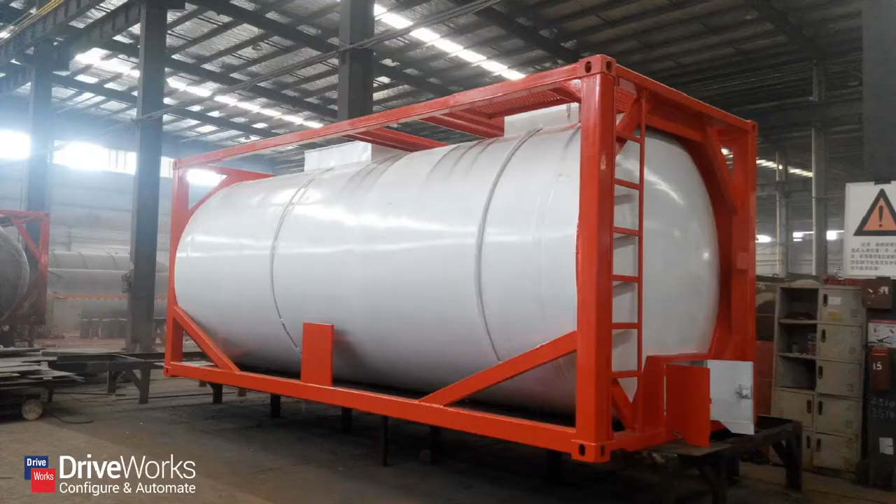When we talk about design automation with DriveWorks, we talk about this term same but different. Design automation for same but different designs. DriveWorks works with any SOLIDWORKS models, but the type of models it's most suited to are things like pressure vessels, windows and doors, shelving units, cabinets, things that often look the same when you go around your town or country. They look the same, but there's variations in their design.

So if we focus on this pressure vessel, what are the variations? We've got dimensions that will change depending on customer requirements. We might have the type of material used to manufacture the vessel, depending on the type of fluid it's going to be holding, and different fixtures and features and so on that make this custom to a specific job.

Now, to talk about what DriveWorks can do, I always think the best place to start is by looking at the entire manual process. How does a custom pressure vessel go from the things that I want into actually getting that design out the door? And remember, this is universal. You can use it on any SOLIDWORKS models. This is just an example.

So how might we start? We might start by a salesperson going out to someone that needs a new pressure vessel and deciding what the requirements of that are and filling out a specification sheet. It might be manual, it might be some custom software that does it, or it might be online, it might be a Google form or something like that. And they'll go through, they'll get where it needs to go, they'll get what it needs to do, they'll get the dimensions that it needs to fit in.

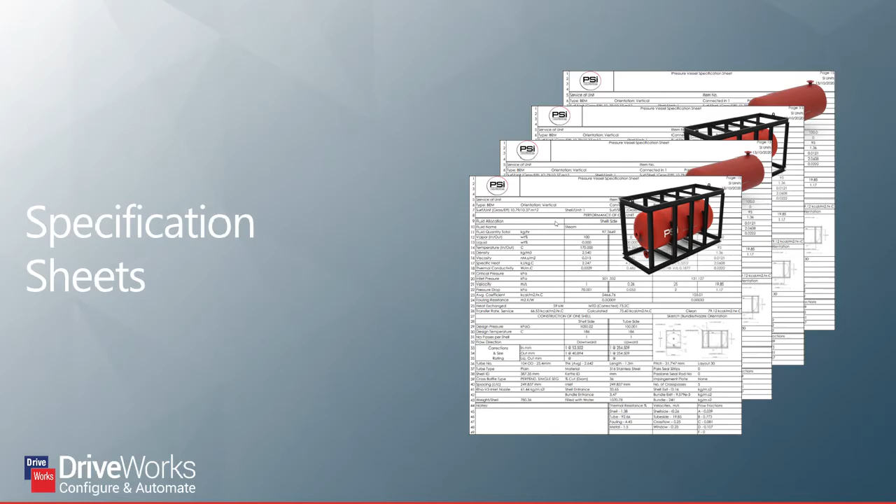And they'll get all of this and they'll take it back to a SOLIDWORKS engineer to go and start creating the manufacturing data. So this might land on someone like yourselves' desk, and you have to go through this manual process.

So often with these same but different type of designs, we start with a template. So here we've got a pressure vessel template. This is just one that we always start from. We go and take a copy of that. So in terms of SOLIDWORKS, it might be a pack and go, or you might just copy all of these files. So we're working with a brand new data set.

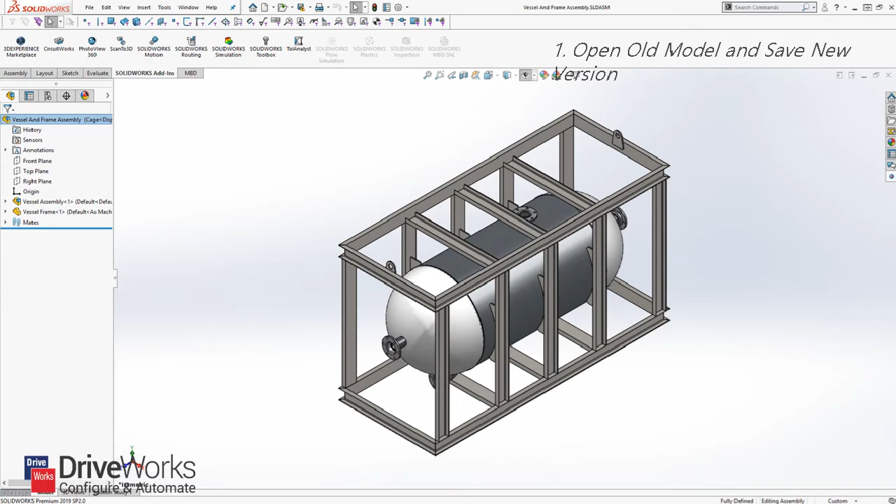And now the process comes of customizing it to fit in with the customer specification. So we'll go and open each part inside that overall assembly. We'll go through and change the parameters so it meets the customer's requirements. So here we're changing a dimension. That might be something that's specified on that spec sheet, or it might be the type of thing that's got a bit of intelligence built into it.

You might have specified, okay, I want my pressure vessel to have a 1,000 millimeter diameter. You might know that the frame actually needs to be 1,000 plus 200 for whatever reason. The specified amount of diameter, the frame height to fit in the pressure vessel needs to add 200 millimeters to that always. And that's the type of design knowledge that's in your head, and you'll go through and you'll change all the dimensions to meet those customer requirements.

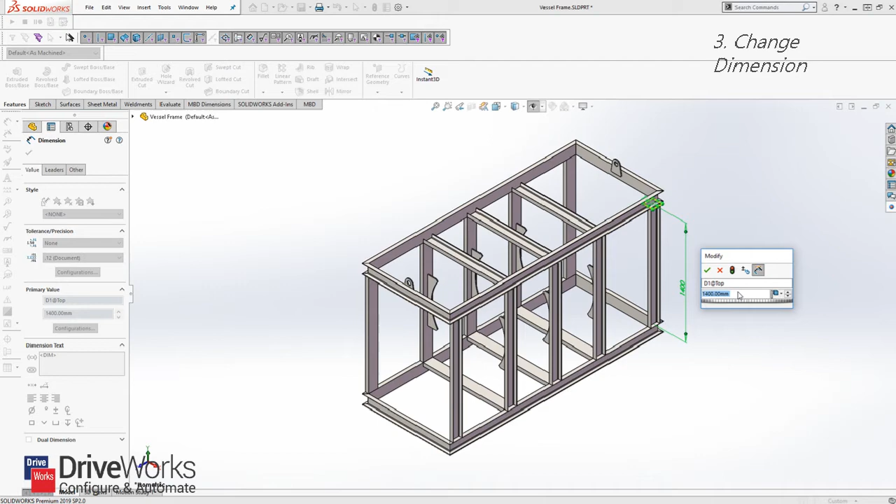Maybe after you've done your dimensions, you'll go in and change your features, turning them on and off, maybe creating new ones, editing the parameters inside each of those features to make sure that the models that you're creating fit in with that custom specification that we talked about at the start.

Now, when we've got our kind of geometry sorted out, we might go and change the materials to make sure it's suitable for that job. Again, might be a bit of your design engineering knowledge. You know that if it's holding a certain type of liquid, then it needs to be a certain material, so it's valid, basically. And that might be in your head.

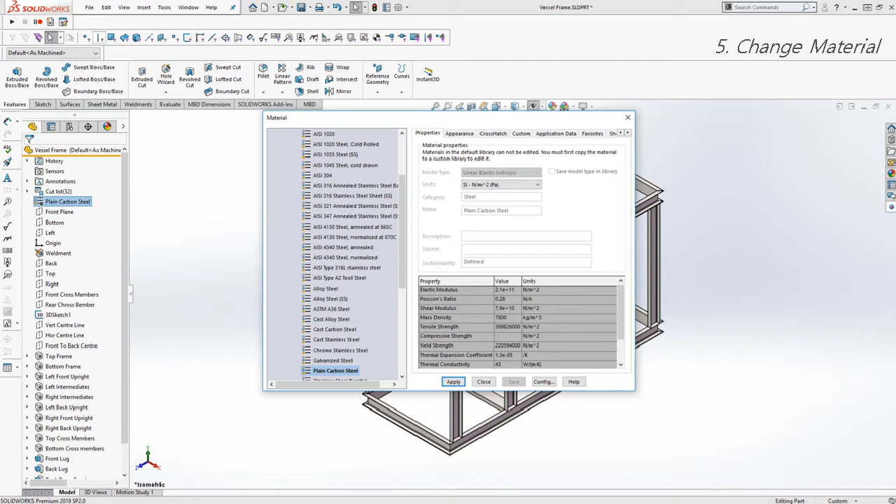And you go through and select that manually. Go through and add all the metadata you need, so your order numbers, your material, when it needs to be manufactured by, when it was ordered, and you go and type all of that in manually. And there's only a few there, but you might have a lot of metadata with each of your parts. That can actually take quite a long time, as I'm sure you know.

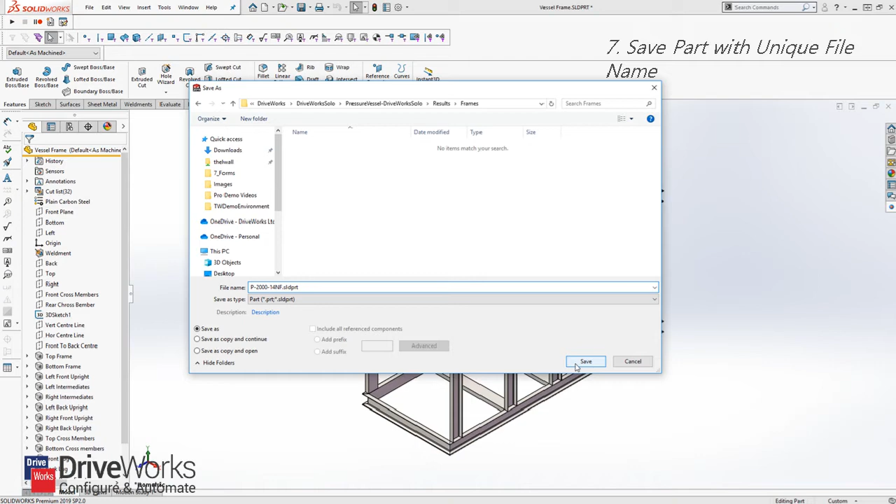Then after you've made all of those changes, you're ready to save your part, and save your part with your company's naming convention. So that might be, as you can see on screen, or it might be a different serialized naming convention. And that's all done manually, and it can be quite difficult to get right sometimes.

So once you've done that, you go through all the other parts, you do the same process for all the other parts, and you're left with your unique assembly that meets the customer's requirements. And then you go and actually create your manufacturing data, your drawing, save that as a PDF, send it off to the shop floor. And you've done that whole manual process of creating a same but different design.

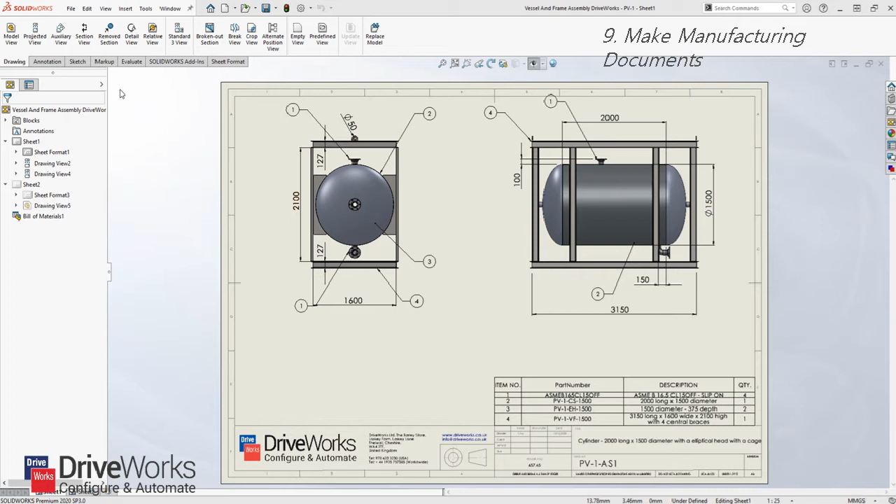So what DriveWorks does is automates that entire process. So we're going to watch a little video now. I think the sound might be quite loud, so what I'm going to do is explain what the video is and then play it, just so I don't have to talk over it at all. This video is going to show you what that process looks like in DriveWorks. So I'm just going to hit play now. You won't hear me speaking for a second, and then I'll recap once the video has ended.

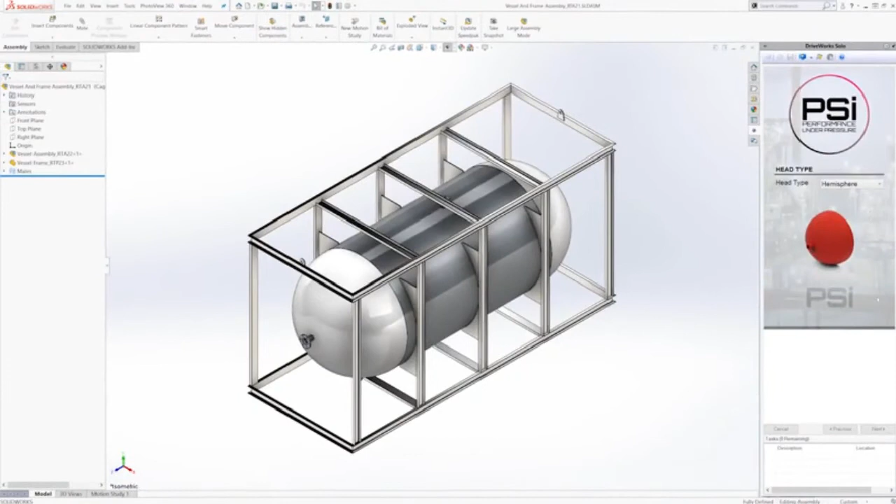So hopefully you can hear me. But here we've got, instead of that spec sheet, we're filling in a custom form on the right-hand side. This is inside SolidWorks. We're filling in that custom form to meet those customer requirements. And we're getting a bit of dynamic updating there, might be minimum and maximum values to ensure those inputs are valid. And then when we're happy with those inputs, we're going to hit finish.

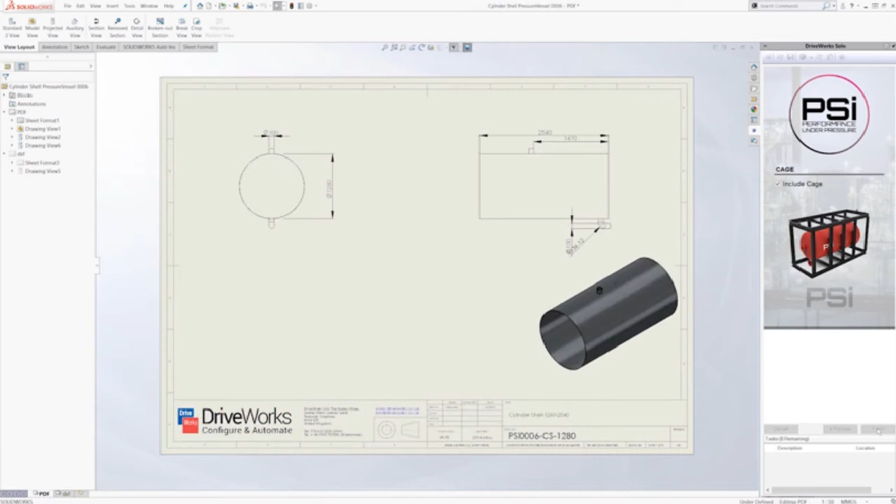What finish does is take a copy of that template automatically, drives all the different dimensions, features, custom properties that need to be created, and goes and creates your drawing at the end for that custom, same but different design. And that's what you can build, that project that does that using DriveWorks. And once you've built it yourselves, you can run that over and over and over again. So that's just a quick video showing you exactly how this process works inside DriveWorks.

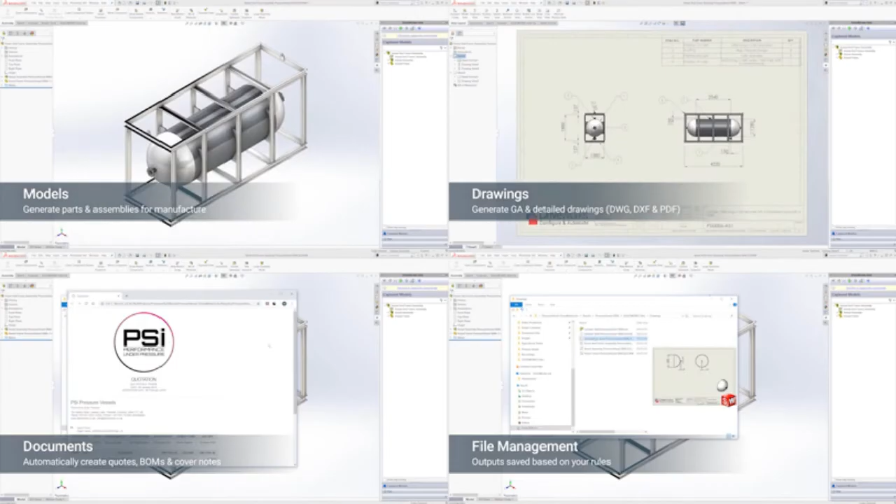So now we've seen the process, what DriveWorks is, we've seen the process it automates, and we've taken a look at what DriveWorks looks like in action, actually automatically doing all of that. We need to know how it works. So there's 4 steps to automation when we're talking about DriveWorks, to our design automation. The first step we do, you can see it on the left-hand side of your screens. We capture our design parameters.

And what that means is we take our template that we're currently having to manually do all the time. We take that template and we capture it. So we tell DriveWorks, I want to create new versions of this. That's what we call capturing. And inside each part inside that assembly, we tell DriveWorks, I want to change this dimension in the new versions of this file that I want to create. I want to be able to change this feature in the new versions of this file that I want to create. And we go through all of our parts and tell DriveWorks what might change. We call that the capturing process.

The next bit is to build that input form so we can get the users' custom values off them, their custom inputs, and make sure that they're valid, so putting things like minimums and maximums, guiding users through that specification process. And they're the first 2 steps, so the capturing bit, telling DriveWorks what might change, creating an input form, allowing users to specify new products.

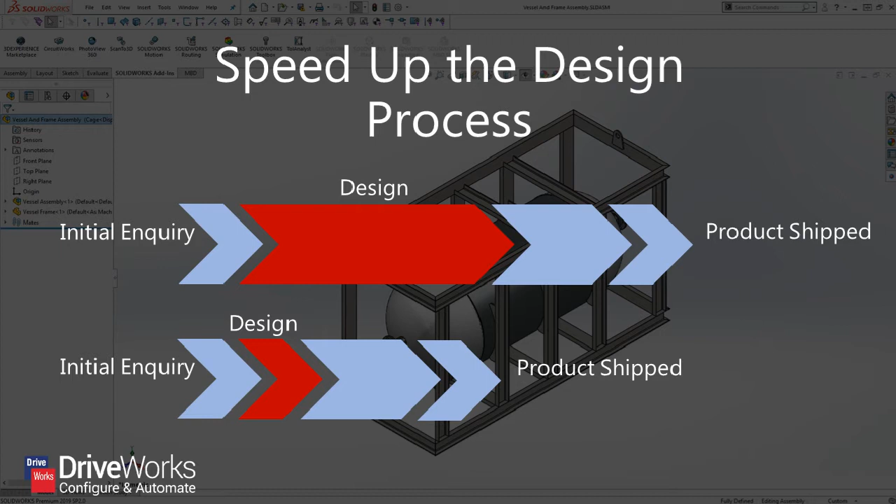Another benefit is one that might be overlooked a lot of the time: eliminating avoidable mistakes. So a lot of the time, if you're doing the same but different designs, you might be changing the same dimension in lots of different parts, and having to add a certain value to it. And it's quite easy to make a mistake there. In addition to that, when we looked at those custom properties, it's quite easy to enter incorrect metadata or even save it in the wrong place with the wrong name.

I know I've named lots of things copy one in brackets, one again, just to get going with things. But building all that into a DriveWorks project means that we never have to do that. DriveWorks will name our files for us based on a set naming convention. And obviously, if we're generating more accurate manufacturing data, we're going to reduce those quoting mistakes as well.

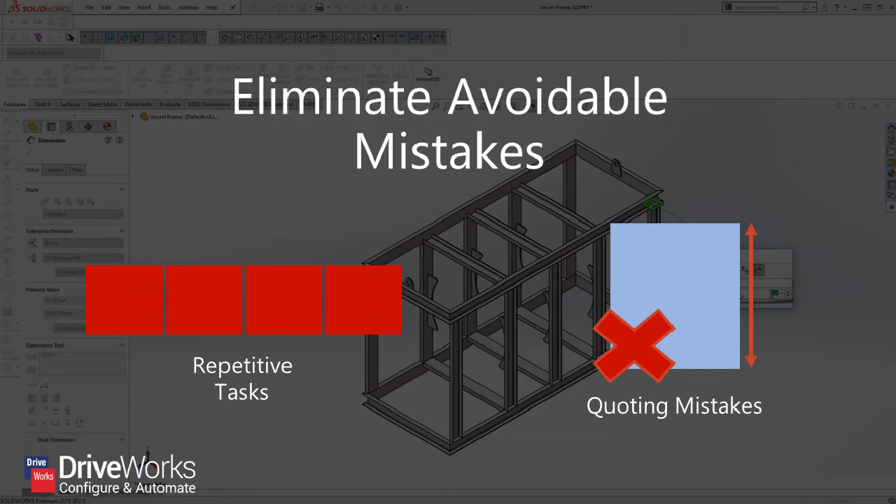But my favorite benefit is this next one. It actually frees up your engineering time. Redoing same but different designs isn't using much of your engineering skill. And automating those processes allows you to actually work on new projects, develop existing products and automate more and more. And the great thing about DriveWorks is, with the time you get back from using design automation with DriveWorks, you can automate more and more of your products. And we'll see what that means graphically in a little bit of time.

So that's an intro to DriveWorks. We've talked about what DriveWorks is. We've talked about the process that it actually automates, what that looks like and how it works. We've looked at some of the benefits, but I think it's time to start looking at the actual software, what you can get started with today.

So that product is DriveWorks Express. As a SOLIDWORKS user, anyone with a seat of SOLIDWORKS or access to a seat of SOLIDWORKS also has access to our entry-level design automation tool, DriveWorks Express. And that's what I'm going to be focusing on today during this live demonstration, building a project from scratch, taking an assembly and automating it so that we can generate brand new versions of it automatically using DriveWorks. And this is our entry-level software. We'll talk about the other software that we offer later on, but let's just get on with the demo.

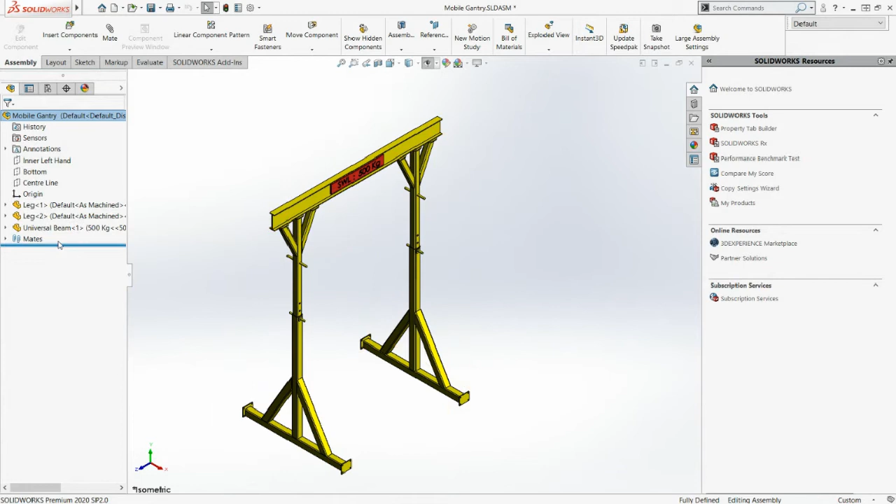And we can see that if we go over here to the feature tree, it's pretty simple, but this is just because we've not got too much time today. And I know how this has been put together very well, as you will know your own components, so you can do something similar to your own components with all that design knowledge. So in here, I've got 2 different components inside the assembly, the leg and the universal beam, and I've got 2 instances of my leg.

So the first thing to do with DriveWorks is we need to go up to Tools, hit Express Products, and hit DriveWorks Express. Now that'll open in the task pane on the right-hand side, and that's how easy it is to open up DriveWorks Express. If you're a student, you'll be able to access that automatically.

If you're not using a student version or an educational version of SOLIDWORKS, you'll need to activate DriveWorks Express. It's still free. You just need to go to My SOLIDWORKS and get the code from your My SOLIDWORKS account. And you can Google DriveWorks Express activate to automate, and you should be able to get a step-by-step process. It's very simple, and you'll get to this point. So now DriveWorks Express is open, and I have my assembly open.

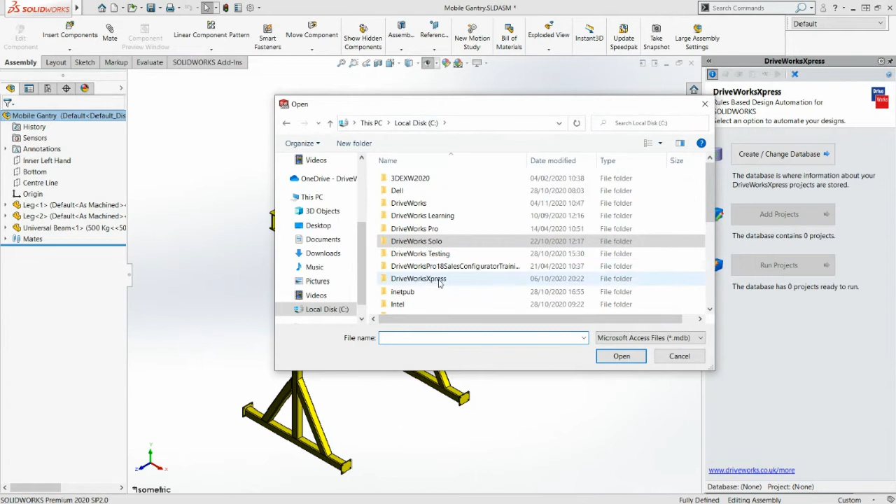The first thing I need to do is create a database. Okay, so what this is, is creating a place to save all of those decisions. So I need a place to save what I capture, where my rules are, what my forms are. This is what this database is. So in there, I'm just going to call it mobile gantry. And hit open. And perfect. I've created a space to save all of my decisions.

And the next thing I need to do is capture my first thing. My first thing is my top level assembly that I want to create new versions of. And DriveWorks Express is quite nice, and I can just hit use open model. As simple as that, I've captured the top level. I've told DriveWorks, using this project, I want to create new versions of this.

The next step, and it's kind of laid out in a nice tabulated way, is I need to capture my assembly structure. So inside this assembly, which components do I want to create new versions of? In this instance, I actually want to create new versions of both, because my leg, when I need a different opening height, that needs to grow and get taller and smaller. And my universal beam, because it needs to get wider, and I want to change my safe working load as well.

If we had standard components in there, maybe something like hinges or feet that don't change size, don't change dimensions, and you just want to have them reference the same file that your master file does, your template file, then you don't need to check that box. This is just telling DriveWorks, I want to go and create new versions of this leg and this universal beam when I create new versions of the top level.

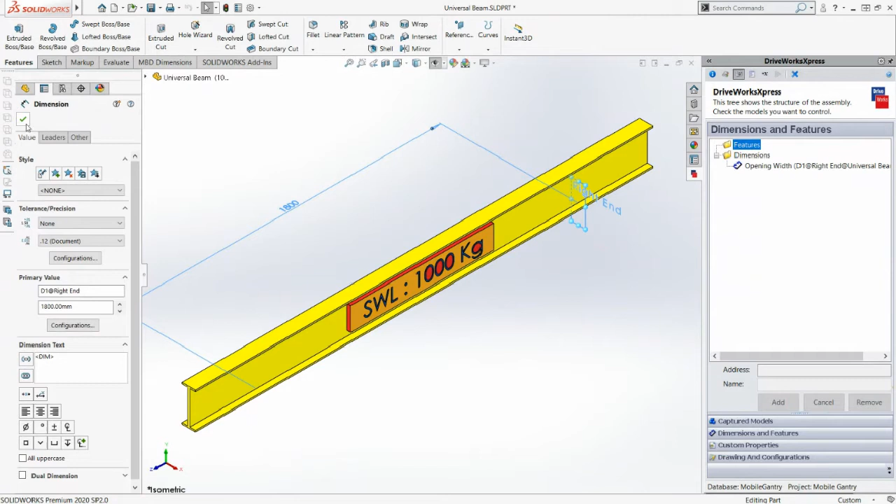So when I build those rules later on, I know what to do. And hit add. In terms of features, I don't need to turn anything on and off inside this part, but I do want to be able to go and change the configuration it's in. If I look at this template file, you can see that we've got 3 different configurations: 1,000 kilograms, 1,500 kilograms, and 500 kilograms. That's what I'm going to swap in the new versions of this part,

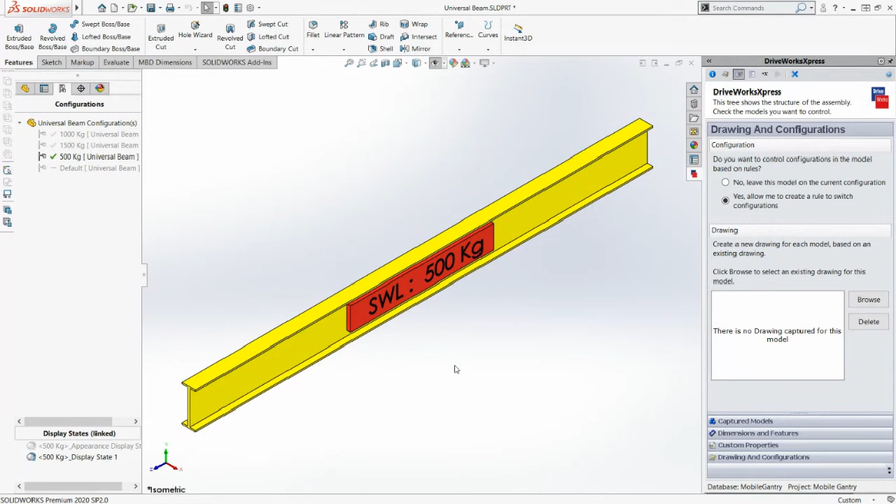and I want the ability to do that. So that means I'm going to go down to my drawings and configurations and just check this radio button. Yes, allow me to create a rule to switch configurations. And as simple as that, I've actually captured everything I need to in my first part. So when I'm done with that, I can close it if I like. I'll just save that. That's just SOLIDWORKS saving. I've already told DriveWorks what I need to do. And I've already saved all the capture parameters inside DriveWorks, because it's a database. You don't have to hit save, it just saves it automatically.

And then I'm going to capture all the parameters inside my other part, my leg. So in here, like I said, I know this model quite well, in the same way that you'll know your model, so you'll know what to capture, what changes when you go and make all those manual changes for your same but different designs. So I've just selected the dimension that defines the opening height, and I'm just going to type in opening height there and hit add. And that's just going to tell DriveWorks I want to be able to change this value in the new versions of this file. Fantastic. So what else do I want to do here?

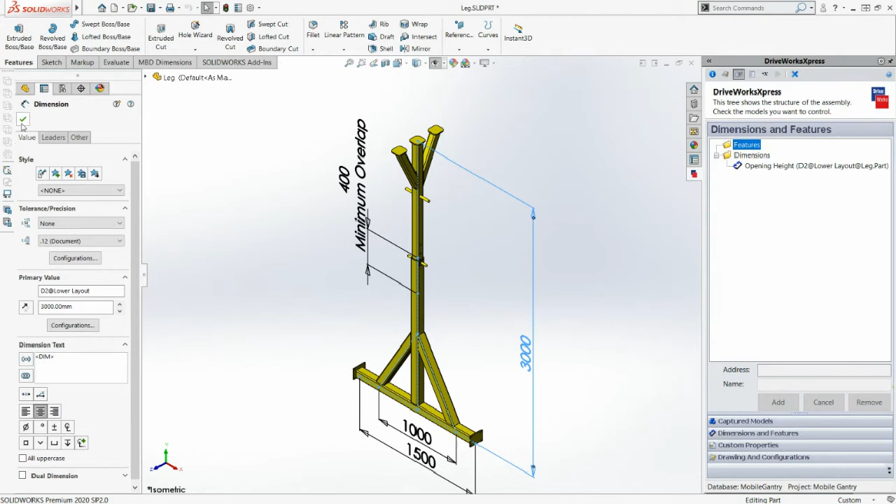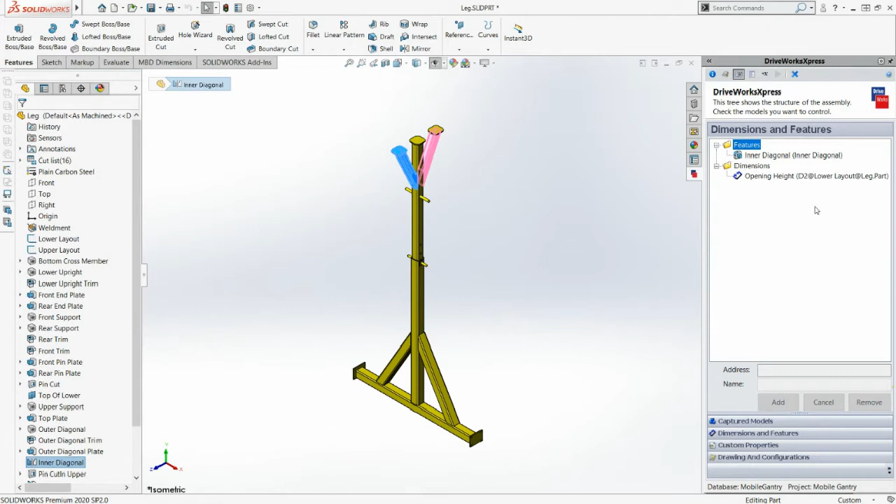I've not got any custom properties that I want to change here, but I do want to be able to change this inner diagonal feature. So I can simply graphically select it, and let's do it over here. You can just graphically select things, or you can select it from the feature tree as well. And that inner diagonal, I'm going to add it. So I've captured that, and I can now, in the new versions of this, turn that on and off. And we could keep going. We could add drawings so that when I create new versions of this, we also create a drawing. But I'm not going to do that for now. I've told DriveWorks everything I want to be able to do with new versions of this part.

So I'm just going to hit close on that, go back to my mobile gantry, and just add a general assembly drawing so that every time I create a new version of this model, I also create a new version of my drawing, which is really nice and saves me lots and lots of time. Inside DriveWorks Express, you don't get the ability to control that drawing much, things like scale and position of different views. So a bit of manual work is often required, but inside Solo and Pro, the next level up of this software, you can control all of that.

So that's great, and we've done the first step. We've captured everything inside this assembly that we want to create new versions of, our mobile gantry, leg, and universal beam, and we've also captured everything inside those parts that we want to change. The next thing I'm going to do is go and build that user interface, build my forms, and this is really, really simple. So the first thing I'm going to do is hit add up there. You'll notice at the top bar, I've just clicked form. It's quite self-explanatory, capturing, form, rules, and that's how you navigate between the different sections of DriveWorks Express.

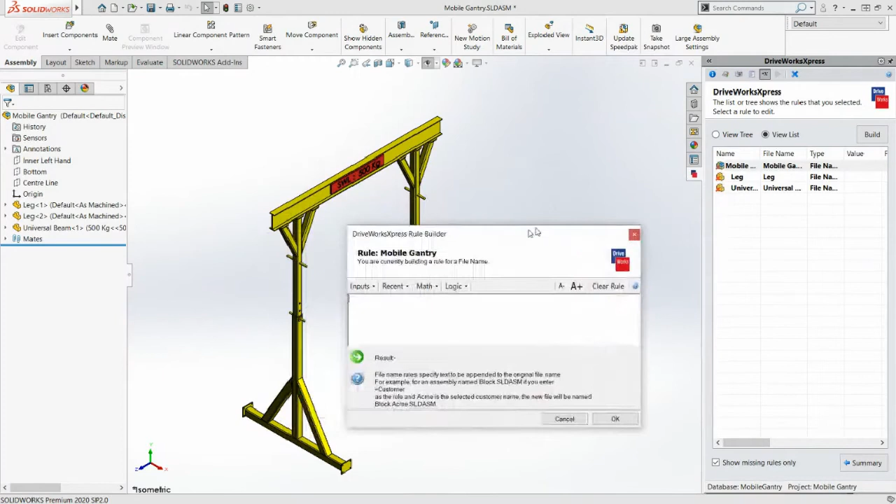So these are going to be really simple to start off with, but I'm going to select the mobile gantry, going to hit build, and that's opened up the DriveWorks Rules Builder for the first time. So I'll try and move this so you can see everything nice and easily, increase the font size, so hopefully that gives you a better look.

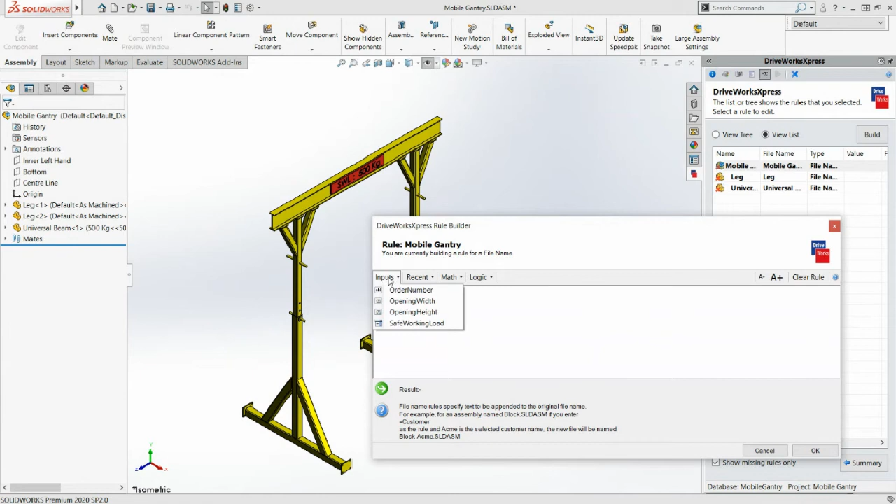And this DriveWorks Express Rules Builder is there to help you build your intelligence and link your inputs to your capture parameters. So you'll see up here, this white section is where we actually build the rule, the syntax we can type out in here. We don't want to do that right now. What we want to do is take one of our inputs, so that order number input, and we want to create our new files with that order number appended onto the end of it.

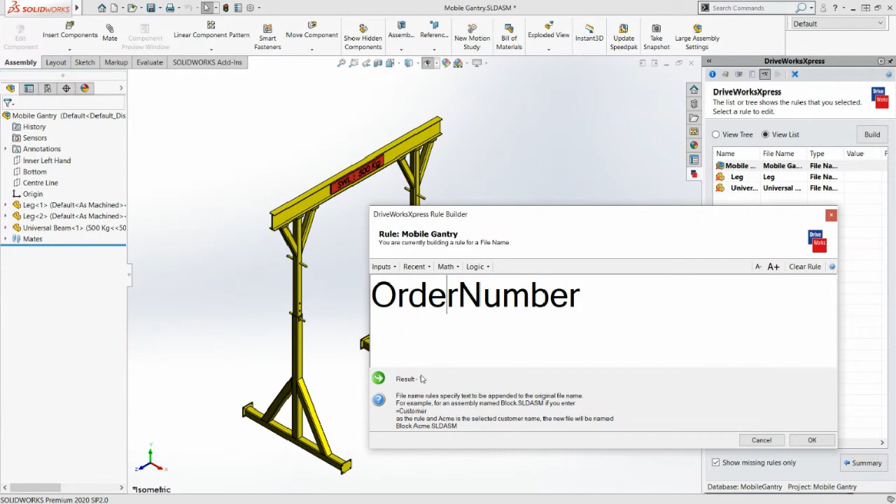So what this is going to do, we're building it for the mobile gantry. When we run this project, we're going to create a new version of the mobile gantry, and we're going to save it with the file name mobile gantry 1. Okay, we can see that that's why I set some defaults, so we can see what this is going to result in now. So I'm going to hit OK.

And we can multi-select to make things quicker. Just for ease, I'm going to build the same rule. But in here, we can build in all that intelligence, so we don't have to manually type out a file name rule anymore. We can take parameters that people are inputting and save out our file names with those names. And we'll take a look at more in-depth rules in a second. I'm just going to use my order number again.

What's great is that all around the DriveWorks Express Rules Builder, wherever you are, you get a little bit of help. So here it says file name rules specify text to be appended to the original file name. Great. If you've not used DriveWorks Express for a little while, or you can't remember exactly how I said this worked, you've got a little bit of help there, so you should be able to get going nice and quick. Now I'm going to hit OK.

And you can see that everything's disappeared from this list because I've built rules for all the file names I need to. I can go and see all the ones I've built if I want to go back and change anything. So that's a great thing about a DriveWorks project. You own it. It's nice and easy to use. There's a good user interface in the background, so you can go and change and develop your project as it grows. I'm going to go back to my summary, and we can see that there were 3 missing rules for my file names. That's gone down to 0.

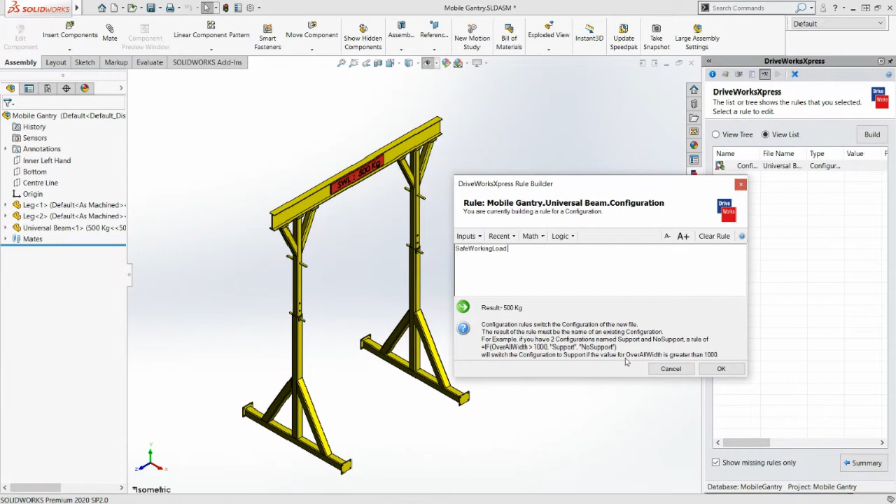And I'm going to uncheck that and go down to my configurations. So you remember this was the captured configuration for my universal beam. I want to build a rule for this, and because my configurations of this part match exactly the inputs for my safe working load, and because I've set those defaults, we've got a result. We can see that there. I can simply build a really simple rule, taking input and directly linking it with something that I've captured. And again, we've got that helper text down there, so you can use it to help you build slightly more complex rules. I'm going to go back.

And now we've built our configuration rules. Remember, I didn't capture any custom properties, but it's very easy to do. Just go back to the capture pane, decide on any custom properties inside each of these, capture them, and you can drive any text you want into them in the new versions of the parts. The next thing I'm going to do is build my dimensions. So if I edit those rules, I've got 2 because I captured the opening height of the leg and the opening width with the universal beam.

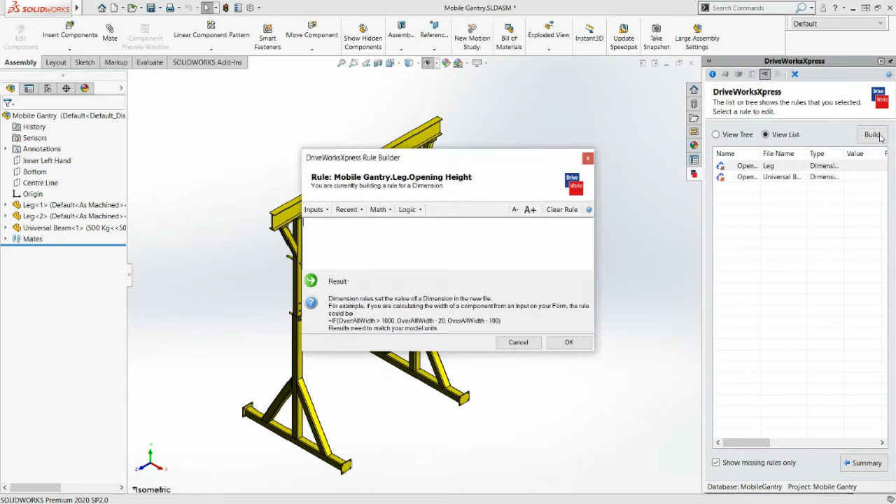I'm going to go and hit build here. Opens up the DriveWorks Express Rules Builder. And inside here, I'm going to link it to my opening height. So I've got about a 3,000 result there. Now, it might not be as simple as just linking it. This is a quick demo, so it is. But you might want to do some maths in there. So you might want to plus 200 to the value that someone's inputting. You want to drive that capture parameter with that. Or go back.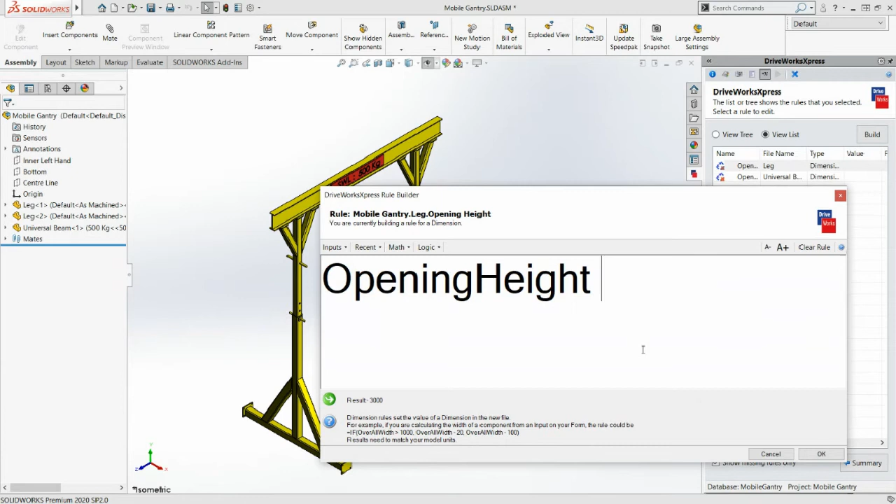You might want to divide by something, or times by something, or subtract something from the value someone's entering, or take two different values that people are entering and add them together or multiply them together. You can do all of that using the DriveWorksXpress Rule Builder and build your engineering knowledge into your DriveWorks rules. So I'm just going to have it as opening height.

That's great. If I hit build and go to my opening width, just link that up and that's done, perfect. So I've built all my dimension rules as well, and we've got one final rule to build, and it's this feature. So here's where we're going to look at slightly more complex rules.

Remember, I captured this inner diagonal, so this part of the leg component. What I want to do is turn this on and off depending on what a user inputs. So what does that mean? Let's go and have a look.

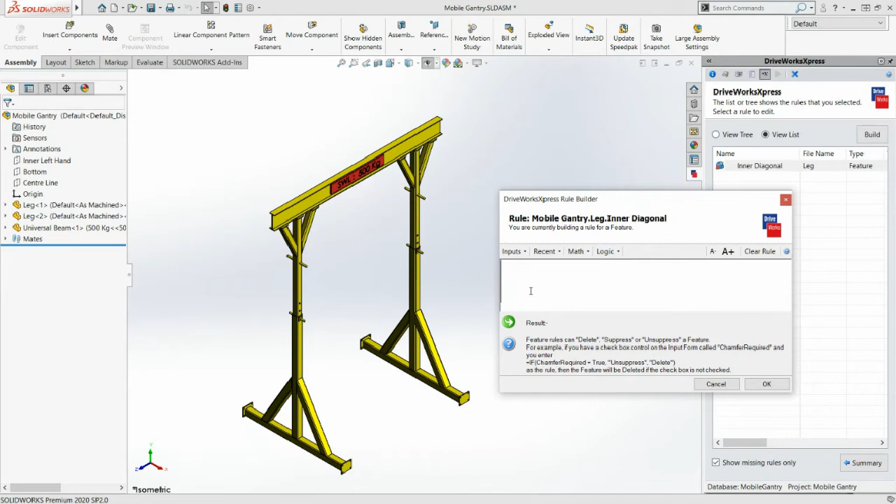So when a user specifies a value over 2,200 for the opening width, I want to include it. I want it to be there in the versions of the leg that I create. When it's below that, it doesn't need that inner diagonal support, and we can get rid of it. So I've got to start using some logic inside my DriveWorks Express rules.

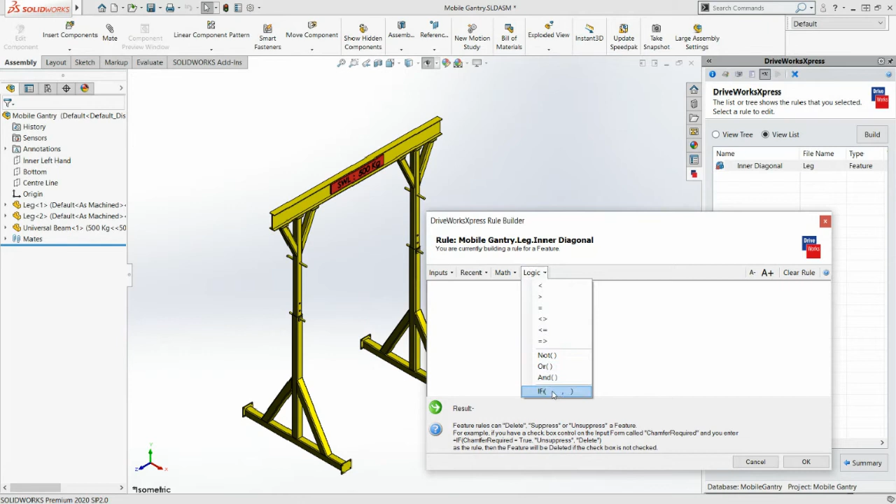So here is where you'll start seeing it look a little bit more like Excel. You can go down here and we've got our logical statements, our less thans, our greater thans, our equal tos, our does not equal. But down here I'm going to use this if function, okay? And we call this an if statement inside DriveWorks.

This is made up of three different parameters, and the first one being our condition. So our condition is going to be: if our opening width is greater than... and you can just type in, you don't need to use the drop downs, but it helps. You'll notice this has gone red, the background, because it's an invalid rule. So DriveWorks is kind to you and helps you not build invalid rules.

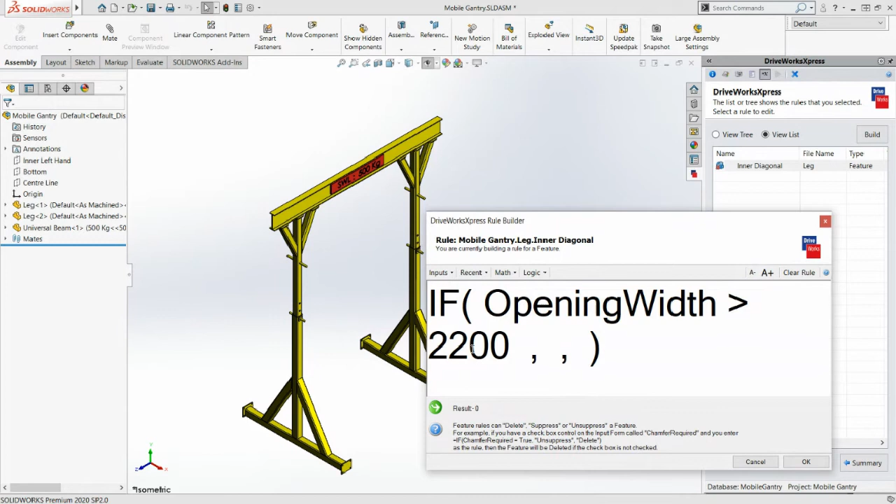So when my opening width is greater than 2,200, then I want this to be unsuppressed. So I'm going to build a text string. All text strings are inside quotes. And what's perfect about this is my spelling isn't great, but we've got a bit of helper text down here to tell you what this rule should evaluate to.

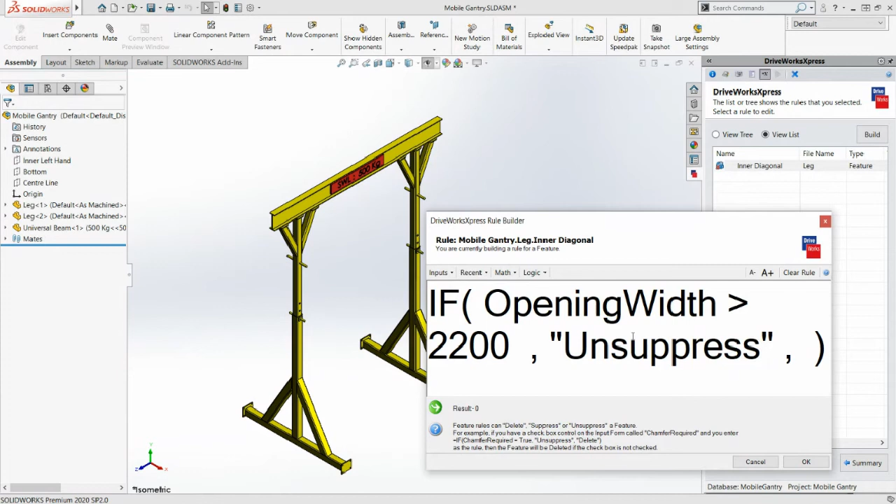It should evaluate to either delete, to remove it, suppress to suppress it, or unsuppress to unsuppress it and have it there. So when it's greater than 2,200, I'm going to unsuppress, and if not, then I'm going to suppress. At the moment, because my opening width is less than 2,200, you'll see that my result is that it's going to be suppressed. This condition is false, so I'm going with the second option. And when it's true, it will go with the first option.

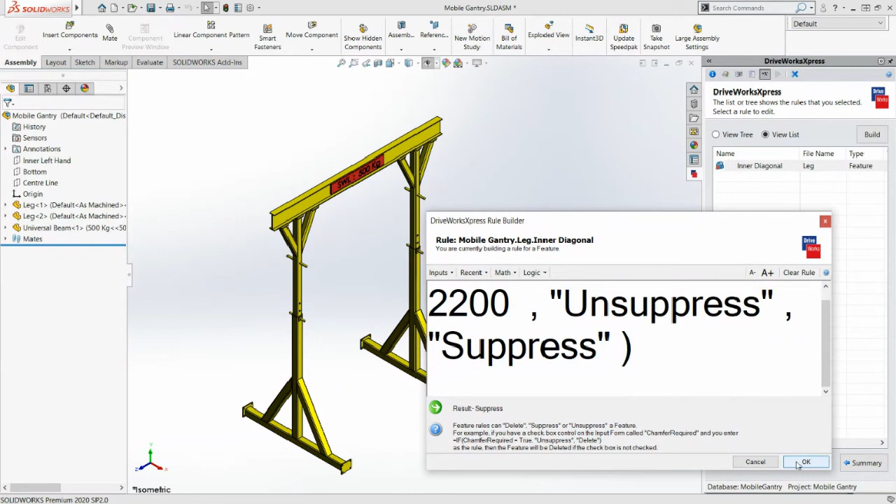Okay, so that's how we build some of that design intent and design intelligence into our DriveWorks rules, and we can start seeing that it's looking a little bit like Excel syntax. So I'm going to hit OK now and go back to the summary, and that's really good.

We can actually see that we've built all the 7 rules that we need to, and we've done the first 3 steps. We've captured everything that might change. We've created an input form so we can enter new custom values for the new product we want to generate. And I've linked them together using rules, and we've even used a bit of intelligence, that if statement, to say if the opening width is greater than 2,200 we need this feature, if not we can suppress it. We don't need it, it isn't required. And we'll actually notice that this icon has turned green. So we're ready to do the 4th step.

And it's the bit where you get back all of that time, and we can go and run our project. So here I've got my defaults. What I'm going to do is hit create here. And we could close everything right now. We don't need to, but we could close all these models, they don't need to be open. I'm just going to hit create.

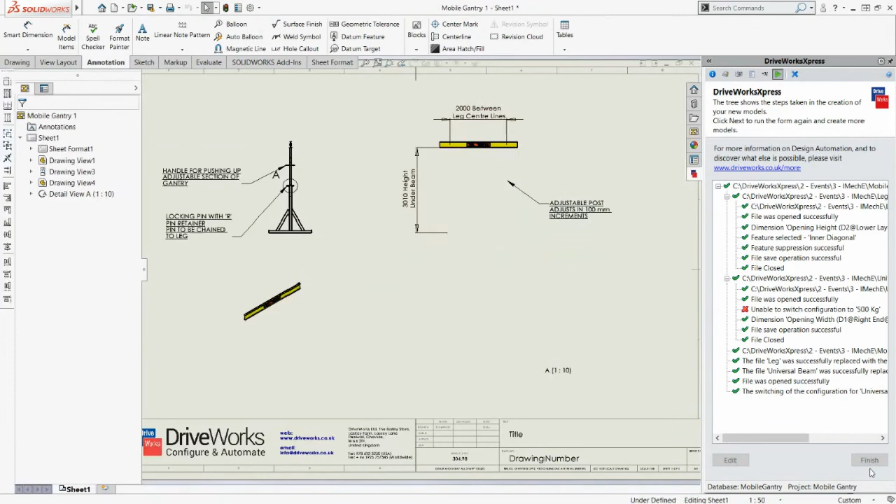So what happens now is DriveWorks takes a copy of that initial template document that we had, and then it goes and opens all the different parts that it needs to and creates new versions of them, driving them with all the values that we need. And then it's going to create our drawing as well for us. We've got this report over here on the right-hand side, showing us how this has worked and what's been successful. Everything's got a green tick apart from this.

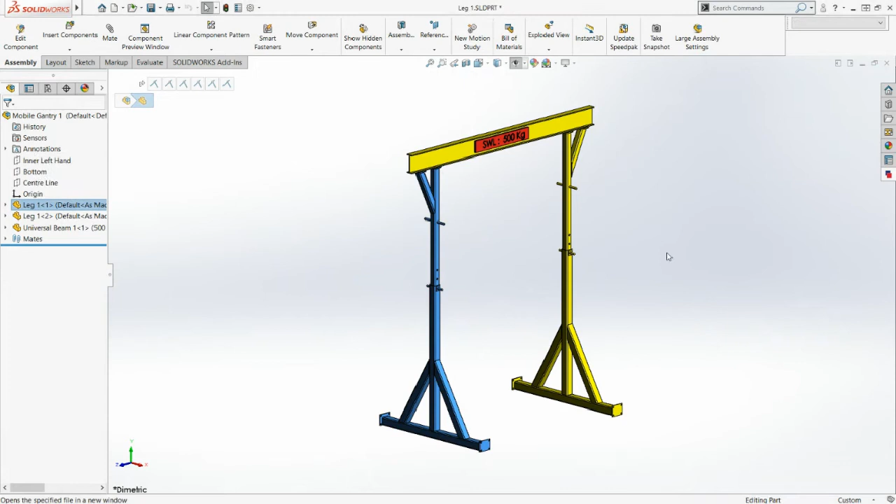And we can see that if we open up our parts, you can see that these are brand new. We've got our Mobile Gantry 1, we've got these named with these different file names. If I open up the parts, let's go and check them. Brand new part, just isn't linked to the template part anymore. We can see that that's been driven to 3000.

Go back and save that, we'll keep changes in our assembly. We'll just go back to DriveWorks Express. And that's great, let's go and run another one just so we can be sure.

Inside order number, I'm going to put my name. Because this is text, this can just be anything. We could build proper rules, so we're just filling out different inputs and putting them all together. We don't need to do that for this one.

I want to have an internal diagonal support, so I'm going to put 2500 there, and maybe let's increase the size of this so it's a little taller, to 3200. And change our safe working load to see if my guess of it already being in that 500 kilogram configuration was the cause for that error.

When I hit create, we can now run our project as many times as we want. We're going to take copies of all of those template files again, create new versions of them, and save them out.

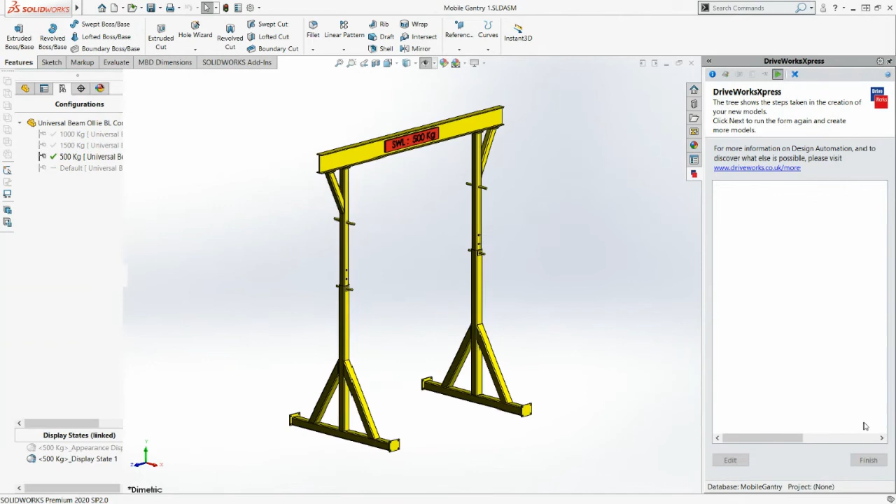Fantastic, so we can see that that's created a brand new assembly for us. My hypothesis was kind of correct, so the universal beam was already in that 500 kilogram configuration. So changing it to the 1500 kilogram configuration has worked, and it's been successfully swapped in there. And we have our inner diagonals now because we've specified an opening width greater than 2200.

So I hope that gives you a nice look at what it takes to go and build up a DriveWorks Express design automation project from the ground up, and take an assembly from a normal SOLIDWORKS assembly to getting it inside a DriveWorks Express project and being able to automate it and create new versions of that whenever you need to. A great thing about DriveWorks Express is that we own that project now.

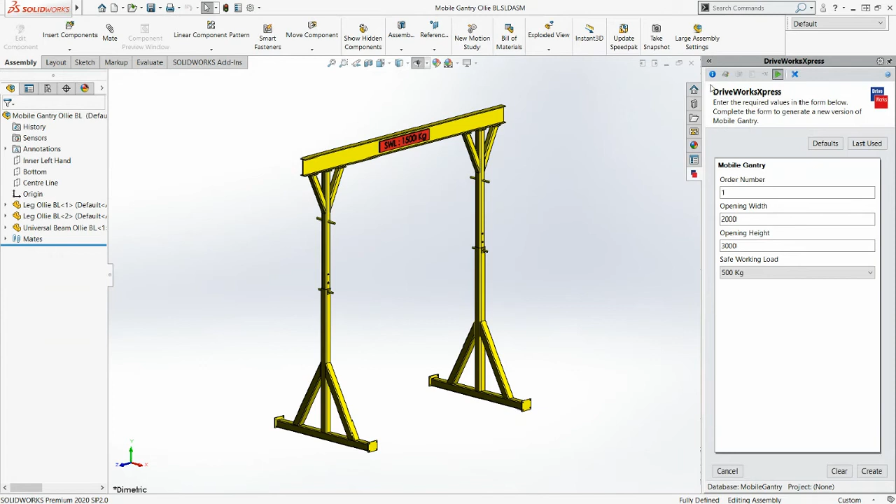So if I go back here and I click on that, I can change it. I know how it works, I know the rules that I've built, I know what I've captured. So I can go on and develop it as this product changes or as I want to automate more and more. So that's everything for that live demonstration.

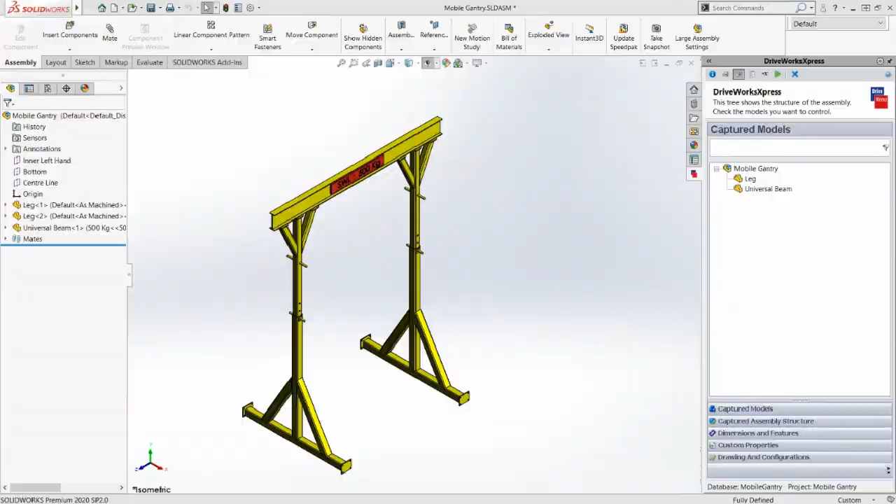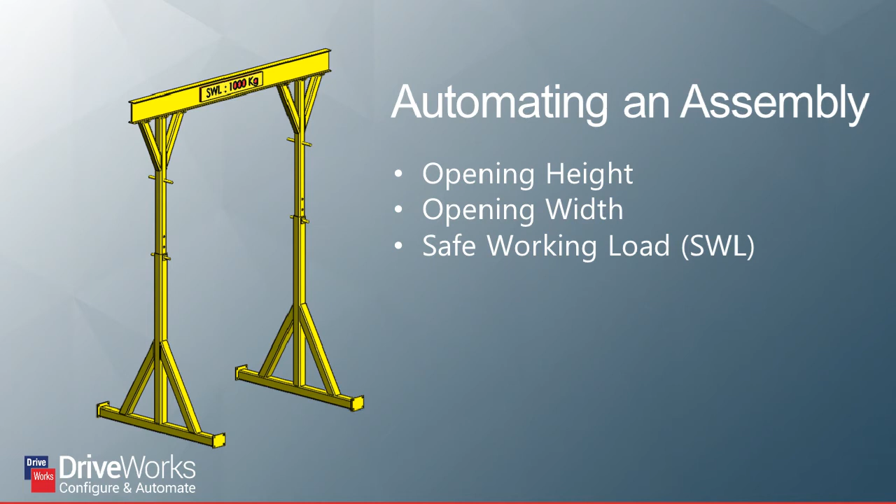So I hope that gave you a really good look at how we can go from normal assembly inside SOLIDWORKS to automating the generation of brand new manufacturing data using DriveWorks Express. And like I mentioned before, DriveWorks allows that business to evolve by getting back all of that time savings. And I think this is a really good way to illustrate what that looks like.

So the goal is to reduce that design time from that manual process to automating it. But because you can go and change and develop your DriveWorks project as you gain more time back from automating small parts of it, you could just start by automating a single component and reduce the design time a little bit. Now, using that time that you've gained, maybe you then go and automate some of the sub-assemblies that we're creating, and then use that time back to start automating full assemblies. And then maybe move on to a different product.

Because DriveWorks is built to be user-friendly, you can see that I understand how to capture things, I understand what is captured. It doesn't rely on any kind of custom code. The rules syntax is very similar to Excel, so it's easy to work with. You can own it and keep developing it as you go.

So the DriveWorks product we've looked at today in detail is DriveWorks Express. I'll just repeat that if you have access to a seat of SolidWorks, you already have access to start building a DriveWorks Express project. So you can get in there and start automating a very simple component today, just start with a bracket or something like that to try and work things out. You already have access to that today.